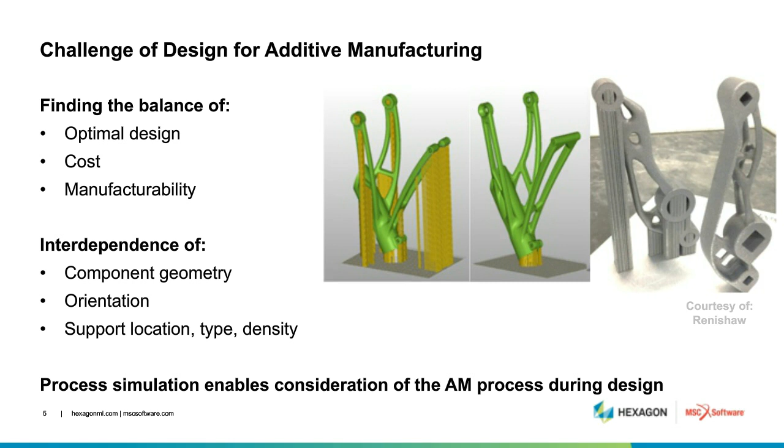Okay, very good. Thank you very much, Jeff. All right, the next speaker we have is Greg. Greg is from Ultimaker. Greg, I'm queuing up your slide, and I'm going to give you control over the slide while you talk. So your opening remarks and self-introduction for 3 minutes, please.

Kenneth, thank you very much, and thank you to our listeners for giving us a chance to talk about manufacturing today and how it can be done with additive technologies. Ultimaker is a unique company where we have a mission about additive manufacturing, and it's really about making things where people want to use them.

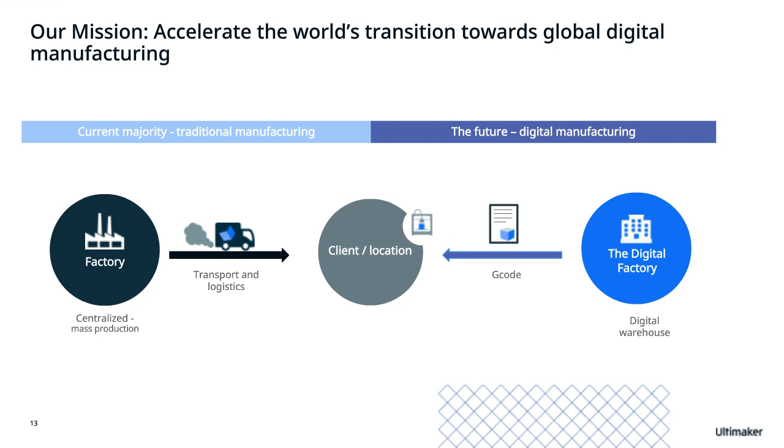Ultimaker is unique in the sense that we have really focused in 4 areas, and it's very relevant to manufacturing. As an engineer, I was taught that keys to solid manufacturing are to reduce variability and to look for areas in the process where you don't have control. So Ultimaker started from a design point of view, and they made the technology very user-friendly. They created an amazingly simple workflow. We allow our customers to run a wide range of commercial materials, regardless of who the manufacturer is. So we call that an open material system.

And one thing we've really tried to do is make it very easy to determine whether the printer is doing what it's supposed to do. So giving the operator some ability to see what's going on, understand the process, but then putting some manufacturing quality into the device where it has a high mean time between failure and very good reliability. The overall impression is that the device is extremely user-friendly, extremely reliable. That's not always been the case for 3D printers.

Ultimaker is approaching this from a complete family of hardware and software. You can try and download Cura at no charge. It's our slicing software. There's over 120 material companies at this point, with many more materials from each one of those companies. So there's a very large range of materials. And service and support is becoming a huge part. Most customers tell us they want our help in doing more with 3D printing. They want us to help them unlock the return on investment.

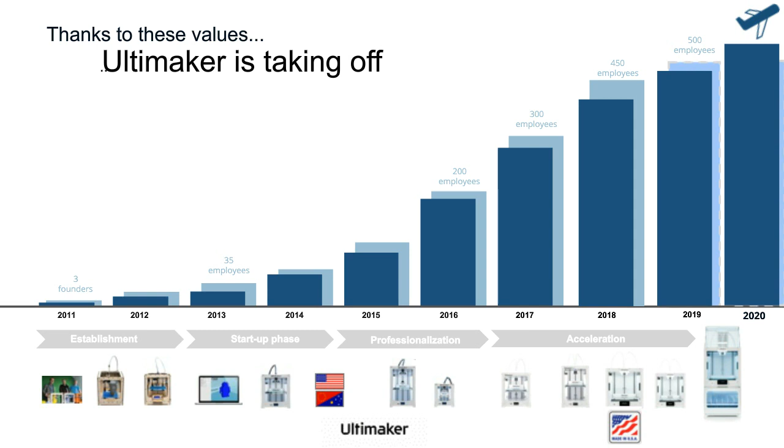To those who are tuning in for the 3-part Civil War series, I'm sorry, that's a different Ken Burns. We have Ken Burns from Forecast 3D. So, Ken, you're up. I'm going to give you control over your slides for your opening remarks and self-introduction for 3 minutes, sir. Great, thank you. And yes, that is unfortunate you won't get that documentary today. But I am Ken Burns.

On the polymer side, we have a large install base primarily in Southern California. We have about 60 polymer machines now. And with metal 3D printing, we have a little over 20 now throughout the globe, including China, Germany, and a couple sites in the U.S.

On the metal side, we're primarily focused on sintering processes, both with EOS and SLM. And then we are also the Metal Jet partner for HP, so producing parts off of the new Metal Jet binder system from HP, and also a material maker, so GKN. The third leg of the additive side is producing the metal powders.

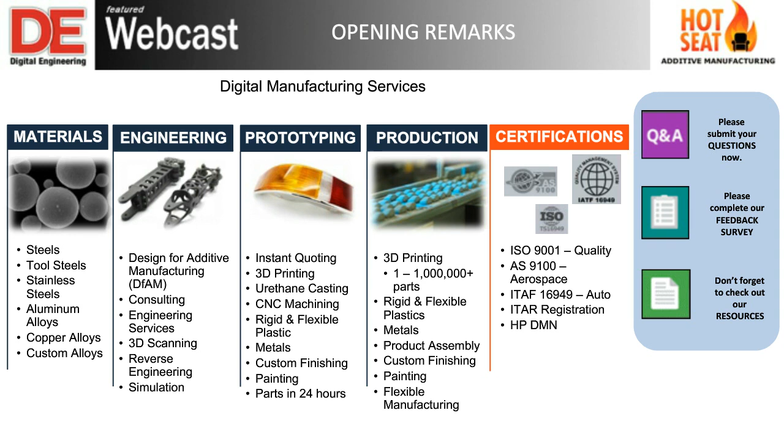All right, audience, I'd like to get you involved as well. This is a live poll. We'd like to see where you are in terms of using additive manufacturing specifically. Do you feel 3D printing or additive manufacturing can be used for mass production of uniform parts? So we're not just talking about a mock-up or a one-of-a-kind part that you want to print just to test out for form, fit, and function, but thinking about using 3D printing or AM for the long run for producing hundreds of parts, thousands of parts over a long period of time to fulfill a certain production run. Do you think that this technology is ready for that?

You may say yes, you may say no, you may say not sure. So tell us what you feel. Tell us what your impression is at the moment, and then I'll give you a couple of seconds, and then we'll take a look at it here. Let's see where you are.

All right, it seems like 78% of the audience feels that this is actually ready for mass production, and there are 12.5% of you that say, nope, that's not quite ready, and then a small minority that says, not sure. So Greg, Ken, and Jeff, our job is, when we do this poll again near the end of the webcast, we'd like to see a percentage that is higher than 78%. Otherwise, we have egg on our face, so to speak.

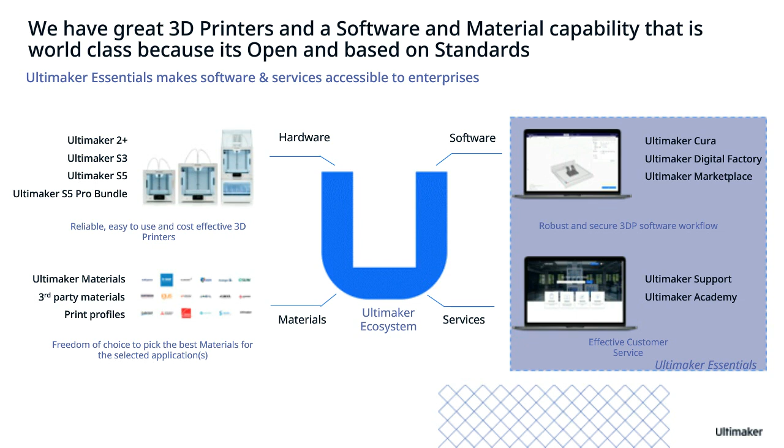And then to take it one step farther, we're working with third-party materials as well as our own Ultimaker portfolio of materials, but they're all based on commercial thermoplastics. So, we're using a PMMA material from Mitsubishi, or an ABS material from Armor, or maybe a PVDF material from Arkema. So, these types of thermoplastics typically have some limits put on them by other 3D printer manufacturers.

We're unique in the sense that we are open and we allow our customers to print these commercially available materials. There's already machined parts and molded parts being made out of these materials. So for an engineer to come back to FFF type printing and do short run manufacturing, bridge manufacturing, it's a powerful way for them to get a very similar part in a very fast period of time.

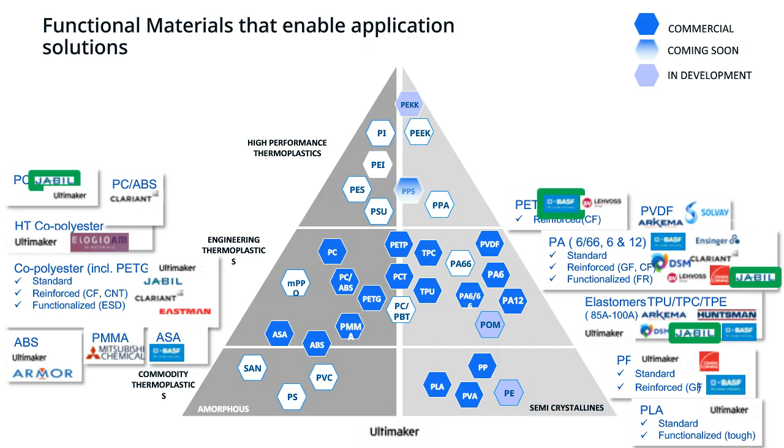All right, very good. Thank you very much for this perspective. I also want to come to you, Ken, because you, in a way, also deal with hardware because you are providing services. So do you agree with what Greg had just said? Do you have anything to add to it?

Yeah, for the most part, I agree. I don't think there's anything that I would contradict in what he said there. I think the thing that most people may not realize who haven't utilized 3D printers, especially in scale, is that I actually think most any 3D print technology out there, the hardware, can be used for manufacturing if you set up the right process controls, you have the right people, the quality systems, post-processing, all those things in line with that and with the application.

I think the thing that most, I'll say, service bureaus and design bureau print houses do as sort of a disservice to the market, which makes it a little bit of a struggle, is that in prototype you can hide a lot of the flaws, and that's acceptable because when you're printing a handful of parts, 2, 3, 4, 5, 10, 20, you can reprint, you can finish parts, you can get them to look like they're supposed to. But when you start doing things at scale, you don't really have time to hide the flaws of the hardware.

So you have to have really good process controls around that to ensure that when you print 1 million of something, they're all good, because 500,000 parts into a quantity of 1 million will be a big problem if there's something wrong with the parameters that were set up. So I think maybe the thing that's often lost is that while we like to say additive manufacturing reduces time to market and there's no tooling costs and all these things, that's true, but there are still other constraints around that that will enable successful applications there.

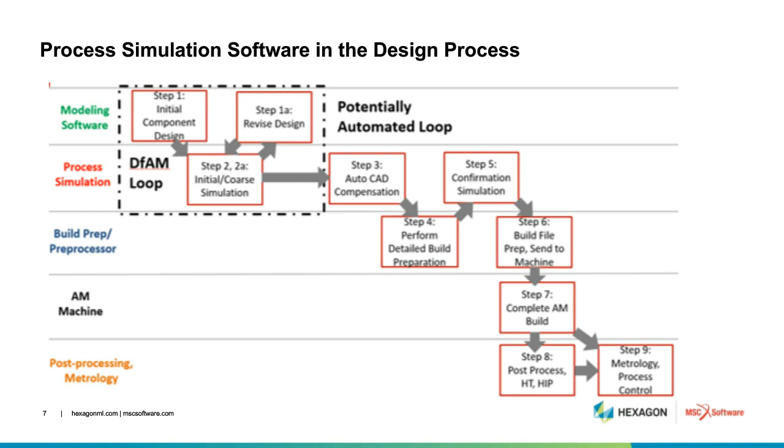Thank you very much. Let's move on to talking about identifying the sweet spot. All the time, it seems like in order to use the technology, you need to identify the right kind of situation or circumstances where the technology is going to serve your purposes. So, Greg, is there a specific kind of purpose or reason why you might want to choose 3D printing? Is there some kind of situation where you look at it and you say, for this engineering job, 3D printing is the only way to do it, no other way to do it?

Yeah, so the best 3D printing applications are around mass complexity, and that's where the cost of machining or the ability to machine or the ability to make a tool and mold either becomes so crazy expensive or it introduces some large amount of variability. The other is mass customization. Some of my colleagues on this call have talked about metal printing. One of the big growth areas for metal printing is in orthopedics, not necessarily of only customized products. Quite a few of the products being produced today are serial devices, and what 3D printing offers is the ability to produce the complex lattice structures.

But having said that, the next area for something like dental or orthodontistry is the mass customization. So those are areas where the technology has really taken off, but it's gonna get some help in other areas. And I put up a slide here. This was an example where the original design of this center console was 26 pounds out of aircraft-grade aluminum, and through topology optimization, they were able to reduce that to 8. Now, you may not want to print that out of direct metal just because of the build size, the part size, or the cost to do it.

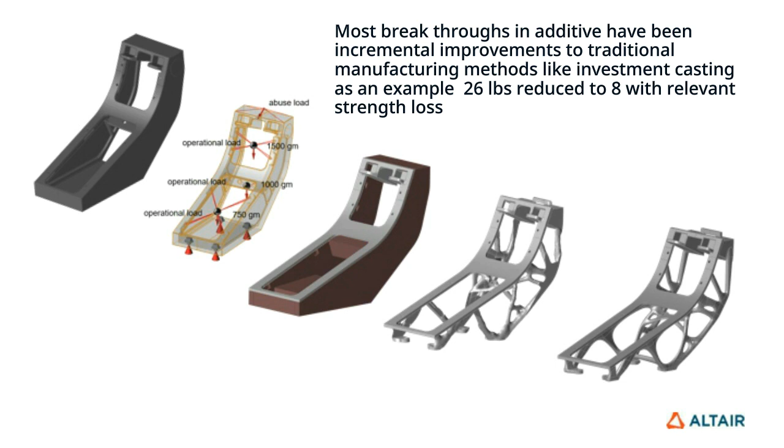Okay, good. Also, Ken, I'm going to turn to you. Let's talk about the volume and the turnaround time that the customers are thinking about. So are there specific types of volumes or turnaround time that make sense for on-demand 3D printing? Or are there times when you look at what the customer is trying to do and you have to advise them that for what they need to do, a traditional machining job may be the way to go? What's your take on that?

Yeah, I'll answer this one a couple of ways. I think often people just want to know a simple number and size of a part to say, hey, this is what additive manufacturing solves. I can tell you from applications that we see and work with, the easiest way to answer this, a sweet spot is under 50,000 units, mainly because a lot of parts today just are not designed for additive manufacturing, so you're not getting a lot of the advantages from additive manufacturing that you can. So instead, you're typically just competing against traditional technologies like injection molding or CNC machining.

So once you start getting into higher quantities with injection molding, your price point gets so low and the cost of tooling amortized is so minimal that it's hard to be competitive there. But there's a lot of opportunity in lower quantities, and there are a lot of applications and products that are produced at sub 50,000 units, maybe even for the life of the product. So I do believe there's a huge opportunity for companies to rethink how they're spending their costs on tooling and just say, hey, maybe this is something we do and we change material to meet that.

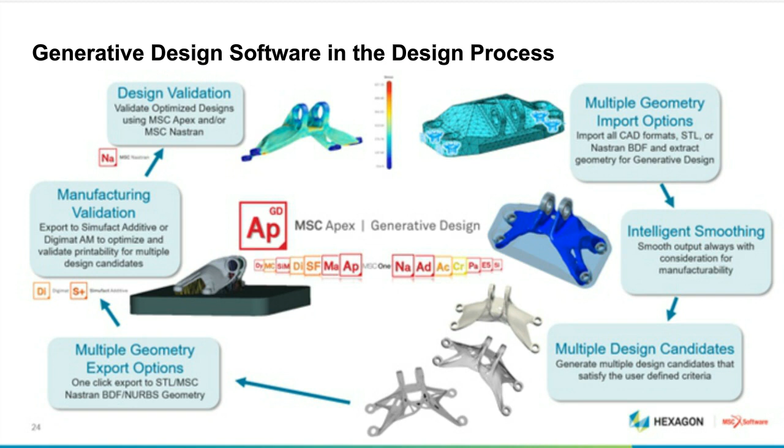All right. Thank you very much. Let's talk about the new normal, and let's see if additive manufacturing has an important role to play here. So during the early phase of the pandemic, AM stepped up and filled the gap, especially in making personal protective equipment or nasal swabs, when many of the machine shops and overseas facilities became unavailable. So, Greg, is there a unique role for AM to play in these uncertain times that we find ourselves in?

Yeah, so I just pushed up a slide that shows one of the designs that the National Institutes of Health had published. So when the COVID crisis broke out, for the first time you had organizations say, hey, here's a 3D printable file that has been deemed safe. And you had that file take off like wildfire across thousands of printers in the United States. Ultimaker had a website that tried to connect people who wanted to print these with people who needed them, and put the two of them in connection with each other.

And it's just one example where, for the first week or two, the alternative was nothing, and so additive manufacturing stepped up and said, no, we can do better than that. We can keep them safe. It's not the cheapest way of doing it, but we can do it today and keep you supplied until the regular supply chain kicks in and takes over.

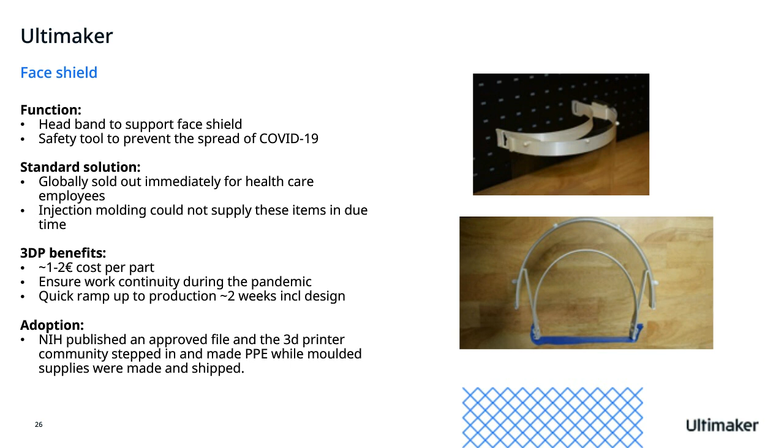You either had something that was idle because it was waiting. You heard about these crises with ventilators where people were 3D printing the splitters for the ventilators and other manifold type parts. So what we've experienced is 3D printing has really stepped into a critical gap, which is that traditional manufacturing just could not respond that fast. And eventually did it? Yes, it did. And it's doing so today very well.

But in that 2 or 3 week period where it was caught flat-footed, that's where additive manufacturing and all the investment people have made in the capacity out there really showed its ability to quickly come online. And again, it goes back to that ability of an NIH file getting presented and adopted. That digital tool created the gateway for the 3D printing world to start making PPE to keep people safe. And it just keeps on going with MRO. So it's an exciting time for our industry.

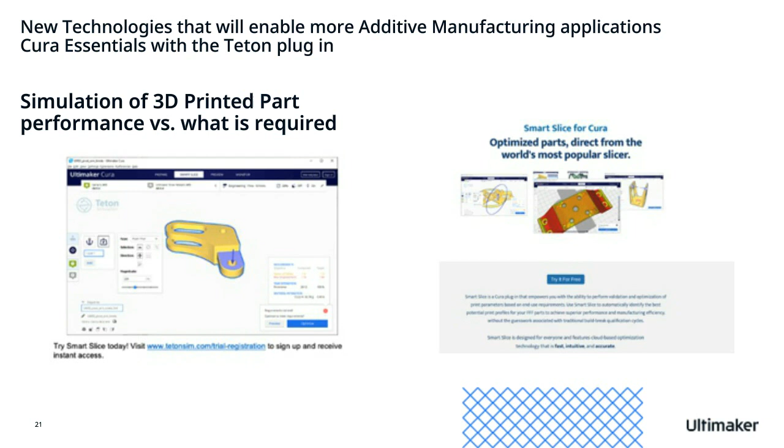Very good, great. Ken, I want to bring you into the discussion here as well. So it seems like there are some industries that might have discovered 3D printing because of the pandemic. Going forward, are there certain kind of applications or certain kind of industry that may actually just go ahead and permanently switch to 3D printing now that they have discovered it? What are your thoughts?

Yeah, that's a big question there. I think sometimes when you're in the middle of something, it seems like the easy answer is yes, they'll replace and switch to it. I think when you get to the other side of it, you see some of the strengths and weaknesses of the additive manufacturing technology versus the traditional technologies. What is it really solving for? I think you'll see more companies utilizing it in the right way.

And as Greg is just saying, there are shortages. So how do you have a digital asset for that product for emergencies or shortages, or when you don't want to keep a higher stock? Or how do you begin your product design with the consideration that I'm going to mass produce this at first, but then when the product goes end of life or spare parts, I want to have an asset that's already qualified for additive manufacturing? So you're qualifying something maybe for injection molding and AM at the same time when you're launching a product.

And this works well in certain industries like aerospace, where they might need more parts at the beginning and tooling makes sense, but it doesn't make sense 20 years later when you have a jet still flying and you only want to make 10 parts a year. Or even automotive, where the typical suppliers have to sign contracts so they're holding stock of these parts for years after they're done producing that vehicle. So I think you'll see more of a combination of these things, and that's using additive in the right way for some of these industries.

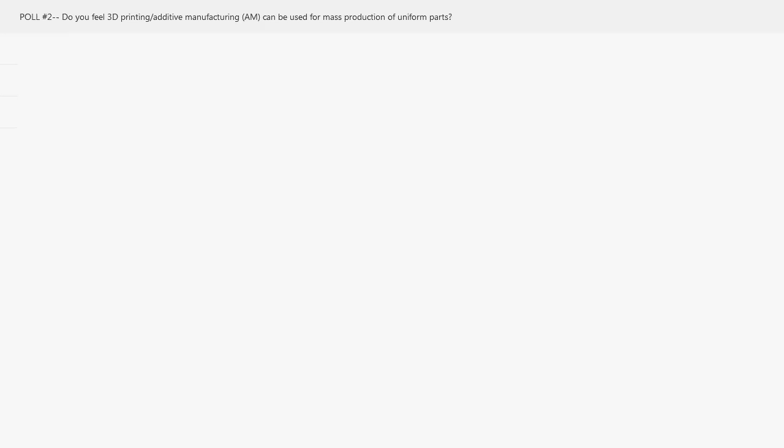All right, gentlemen, I think we did a wonderful job. We were trying to beat the 78% we got in the first poll, and it seems like right now we're getting 100%. So good job, everybody. I have only one more minute left, so very quickly, if you can give your closing remarks or last words. Jeff, let's start with you.

Sure. I just want to emphasize the importance of design and simulation tools within the DFAM workflow. The tools are tools that enable us to get to the right answer. And it's how we use those tools in the workflow and where we incorporate them in the workflow that can make the biggest difference. Thank you. All right, very good. And then, Greg, your last word, sir.

Yeah, if anyone on this call is interested in exploring 3D printing, Ultimaker is an excellent entry-level technology. Download Cura software from our website for free. You can start orienting your STL files. You can always send those off to companies like Forecast for printing. But for a $2,000 to $10,000 device that can compete with machined parts in many cases, it's a powerful manufacturing tool. Very good. Ken, you have the last word, so to speak, before I thank the audience.

All right. Well, I just encourage anyone out there who's looking to really go into manufacturing with it that it's a partnership these days. You can't really do anything on your own. So there's everything from the hardware to software to the right manufacturing partner to make sure you're engaged with on all fronts to have really successful products. So engage. All right, very good, wonderful.